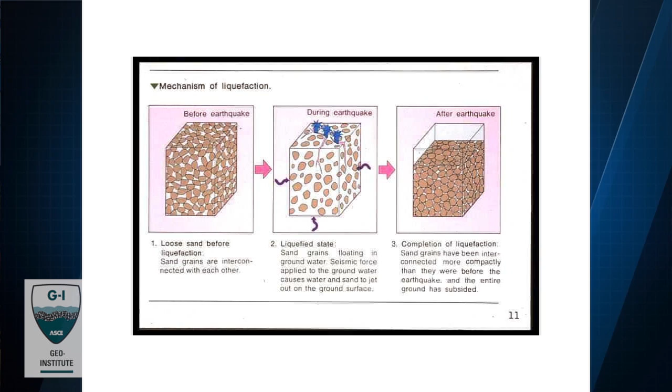So I thought, after working in this business for 50 years, if people are still asking what is liquefaction, maybe we should recap a few basic fundamentals.

Here we have a deposit of sand, very loose and saturated. When it is shaken, two things happen: the sand structure tends to collapse and pushes the water out. The rate at which it does that depends on the pressure and density of the sand. But the other thing that happens, when it's all over, is you get settlement. Now I'll show you a few slides that illustrate that.

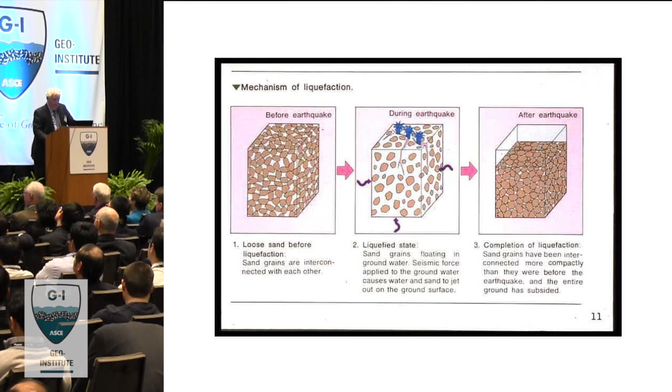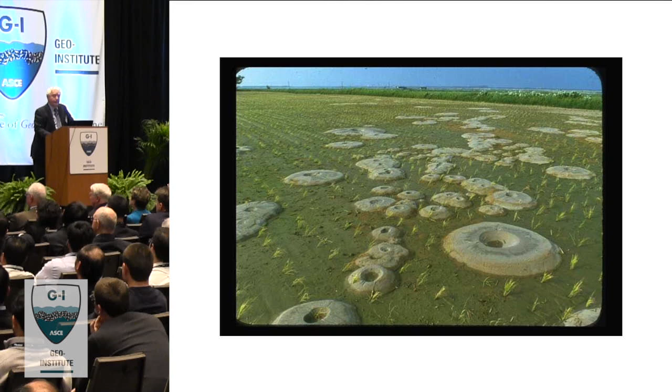is pretty steady. On the other hand, if you look at this one, the sand was ejected with explosive force. There was a fairly stiff layer overlying the liquefied material. The pressure had to build to a very high level to get out, and it suddenly just popped everything. So you see two sources, one here, about 2 meters, and all that sand was deposited as a result of the ejected material in essentially one blast.

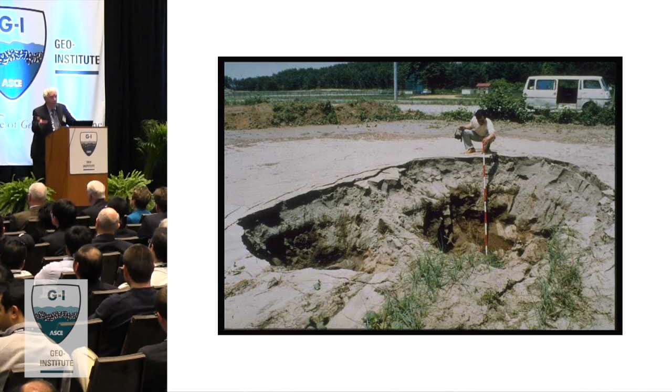In the northern part of Japan, around Noshiro and Akita Port, there were warehouses along the dock in which the floor had been blown up, and inside the warehouse was a huge mound ejected from something like that. So it's a very powerful phenomenon.

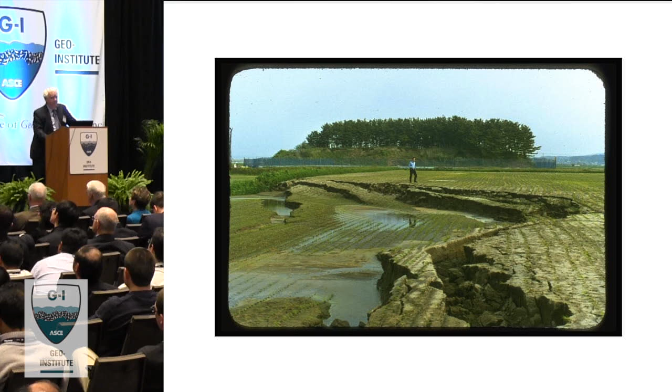Now this is a much more surface phenomenon. Part of the field is very loose and has settled, and there's nothing very special about that. But you can see that when we identify that a soil liquefies in the charts we use, we're not sure what the story is behind that. There are very different stories behind all of these, and that makes interpretation difficult.

I tend to use this example for my students when I tell them that you have to worry about balanced design. No point in designing a fortress-like structure with a lousy foundation. On the other hand, there's no point in over-designing the foundation beyond the requirements of the structure for survival.

Now, the other thing that happens when you have liquefaction is lateral spreading. On gentle slopes, it goes on for a while and peters out. But if you're close to a river or a deep ditch, then very extensive movements can occur.

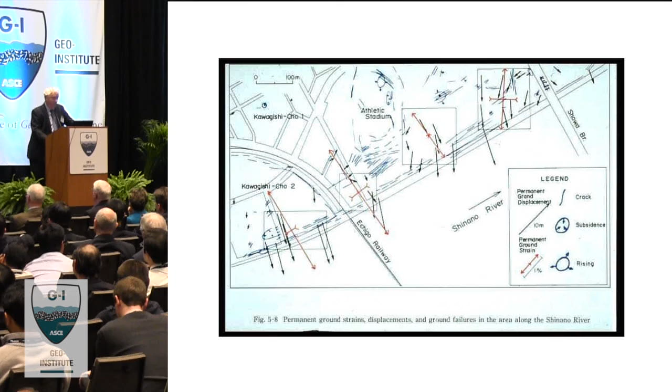Now, that had some interesting repercussions after the earthquake. There were some legal questions as to who owned what — a 10-meter-plus shift in a Japanese lot is an unheard-of thing. So there were arguments over who owned what. Now, the Showa Bridge — the bank moved in.

The top was held by this deep girder, which is tucked underneath, and it caused great damage to the bridge. They managed to prop it up and fix it. Now, this one is from the Kobe earthquake, 1995.

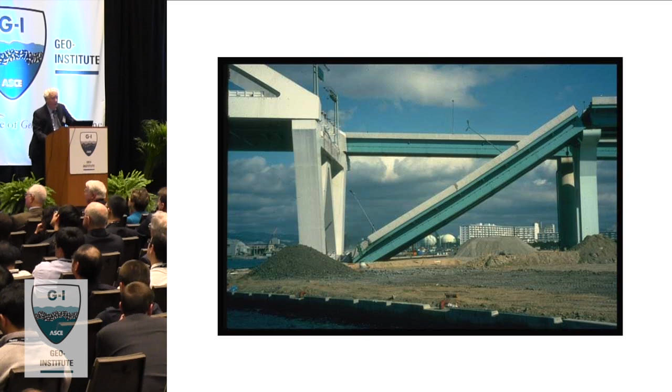Around here, the movement was about a meter, sometimes a meter and a half, into the river channel because the stuff liquefied behind the sheet piling. That caused this bridge deck to move in this direction, and the restrainers were inadequate to hold this, and it fell down. The only casualty was a truck driver who was on it at the time it fell, and he was killed. Now, the other thing of great interest to us is what happens to pile foundations when the ground moves.

Especially in port structures, that's a very important issue. The Japanese took this particular example where you have a layer near the surface that does not liquefy, a liquefiable layer, and then a layer that does not liquefy again. So the pile is sandwiched between two non-liquefying layers, and there's a lot of movement to the right or left. On the basis of many case histories, they came up with a way to analyze that: put these forces on the pile foundation, passive pressure up here, about half of the vertical pressure along here, and then analyze the pile to see what happened.

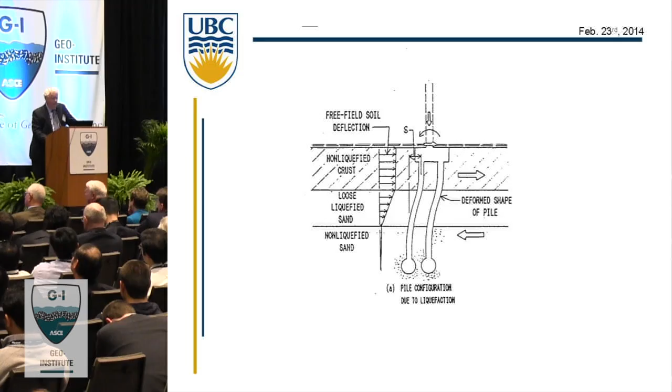That's used by one group in Japan, I think it's the railways, but it's not universally accepted. Now, when I was in Japan, I was on retainer to one of the construction companies, and they built apartment buildings around Western Japan, all on reclaimed land. They were supported on piles, concrete cast-in-place piles, minimum of 1 meter in diameter, more likely 1.5 or 1.2, one pile under each column.

And there were questions about how deep you have to bring down significant reinforcement in the cast-in-place pile. So we had to study that problem, and here is a case where you have a layer, just like I showed you, that does not liquefy, a fairly stiff layer. This is a soft layer, but not liquefiable, and then you have a stiff layer again.

So to convince them that there was a need to carry reinforcement down the pile, you can see where the large moments are accumulating, and they're about the same size. One is at the underside, and one is very close to the layer at the bottom. So that convinced them that they should not start cutting off the reinforcement until they were well down into this material.

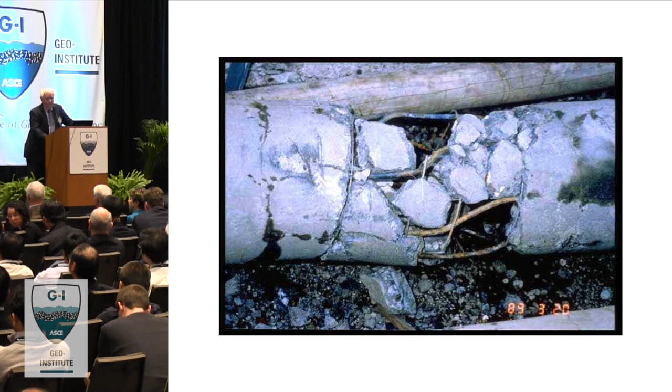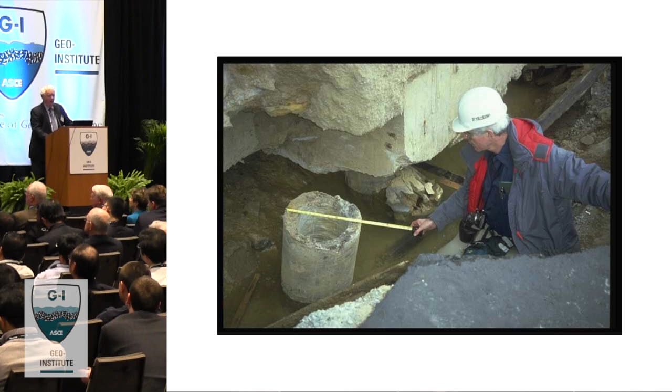This is Tom O'Rourke from Cornell. We were together on this occasion, and this is a nicely sheared off pile. The other part of the pile is right here. But again, you don't see any dense reinforcement.

Now, I found this one. I was on a crane rail, and I wondered what was happening to the pile, so I leant over, someone held my legs, and I went over and took this picture. Now, this movement is a little over a meter. The soil has come this way, flowed past the pile, with no apparent damage to the pile.

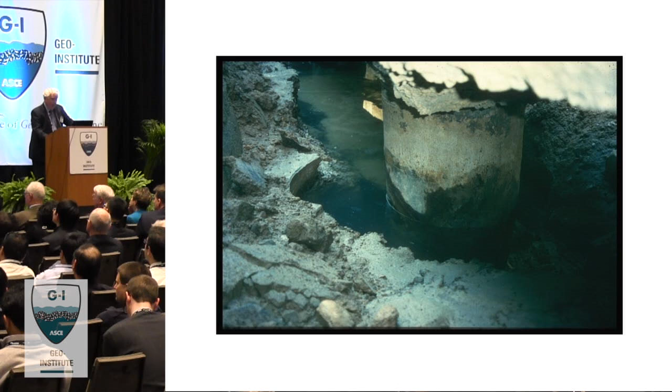Now, this pile was designed to carry crane loads, so it had a horizontal component in the design. They also put in a steel pile, of course, which had a much better survival rate. So when some lateral loading has been built into the system, those piles behave quite well, actually.

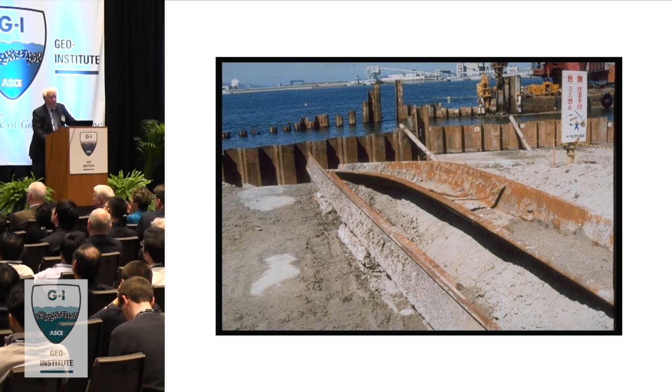Now, this is an example of, I took this because I wanted my students to see if they could figure out what the pressure of the liquefied soil was, based on the yielded shape of that pile. I can't remember now how successful they were compared to what theory would tell you, but I think they were pretty close. Now, so much for a warm-up.

We know what liquefaction is. We know what the problems are. Now let me take you back to the very beginning.

It's 1964. Two earthquakes have occurred: one, the Good Friday earthquake in Alaska, the June earthquake in Niigata. A big problem in both was liquefaction, wholesale liquefaction, flow slides, you name it.

Now, an urgent problem in Alaska was reconstruction, and of course most of that stuff had to be mortgaged. Mortgagees wanted to know, how safe is it to rebuild there? Shannon and Wilson in Seattle were commissioned to supply the advice that was needed on that topic.

Stan Wilson was a very, very clever engineer. He knew that this was going to pose new problems for him. Testing up to date would be inadequate to test the response of soils under cyclic loading of the earthquake. Liquefaction, nobody knew anything about it, except later on they looked back and saw it happened also in 1906, but nobody had studied it from a technical point of view.

So Stan Wilson had his friend, Harry Seed. They'd been to Harvard together. Harry was in Berkeley, and furthermore Harry was carrying out pulsating load tests for the State Highway Department—where you put the load on, you lift it up, but you don't pull the sample both ways to imitate the effect of traffic loading on a base. So that seemed like a great start.

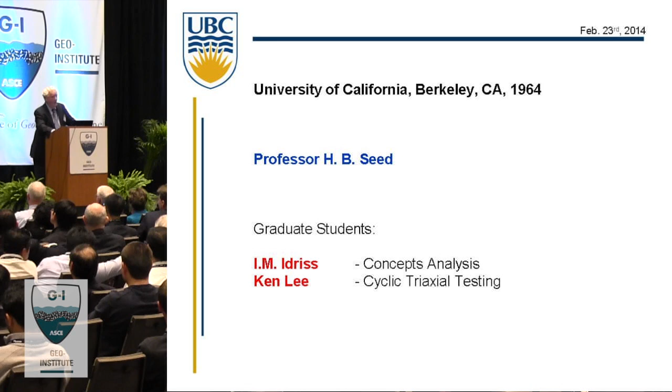Ken Lee, meantime, was beating his brains out, trying to liquefy a sample using pulsating loadings, and it wouldn't cooperate.

About this time, I had been invited in 1963 to come to Berkeley as the visiting professor in 1964. Harry invited me personally, and so I arrived on the scene just as this work was getting underway. And I saw how little anybody knew about this field, so I said to myself, what the hell am I doing in plasticity, which was my field, and I was going down to give lectures on it. And at that time, people knew a lot about plasticity.

There were some world leaders at Berkeley, like Naghdi. There was Prager back at Brown University. I was just a humble graduate from the University of Washington, but I thought, this is great, I'm going to get into this field when I go back. So I paid strict attention to what Harry and his cohorts were doing.

Now, Ken Lee was lucky. One night, something went wrong—instead of pulsating, the load grabbed the head of the sample and turned it into a cyclic load test. And it liquefied. So Ken was taken care of. He spent the next couple of years testing Monterey sand and Sacramento River sand, finding out what variables control liquefaction, giving us a deeper understanding of what it was all about.

Now somebody's got to do something about that. Now we know what stresses will cause liquefaction in the sand of a certain density. In those days, the CPT was not in the game, or the SPT either.

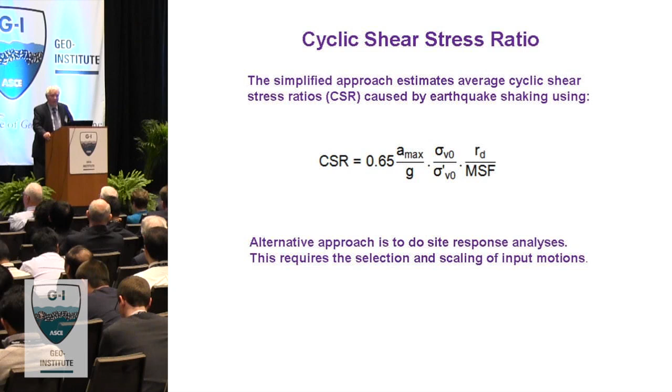Now, the one thing that did surprise me was Berkeley - but I may be running ahead of myself here. Let me stop at 75, at the time Harry, Martin and I developed that model, because this was a unique time actually. The state of the art coincided exactly with the state of practice - the cyclic loading testing, liquefaction triggering.

Now, there were two programs developed that were very useful: SHAKE by Seed and Schnabel, and Quad 4, in which Professor Idriss made a unique contribution by introducing variable damping in every finite element. Everybody was satisfied.

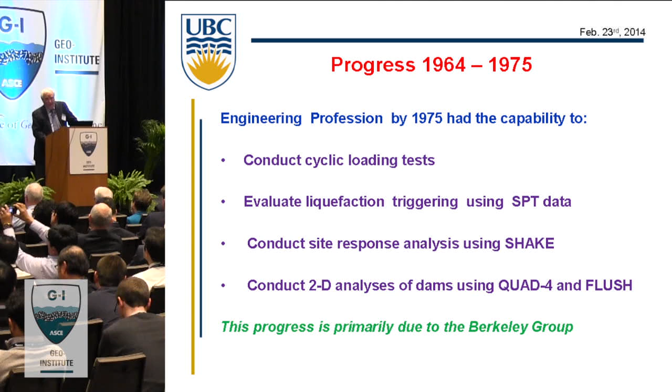It was like the Roman Catholic Church before the Reformation, and Harry was the Pope. And all that was due to the group at Berkeley. I have to give them full credit for that. Thinking about that last year at the Geo Congress, when I gave a paper on something else, I recognized

I think I'd like to read it if you don't mind. This paper is dedicated to three men who laid the foundations for the development of geotechnical earthquake engineering in the 1960s and nurtured its growth by major contributions to teaching, research, and practice over many years. The late Professor H.B. Seed of the University of California at Berkeley and his PhD students at that time, Professor Ken Lee of the University of California, Los Angeles, who died very young in a skiing accident, and Professor I.M. Idriss, recently retired from the University of California at Davis.

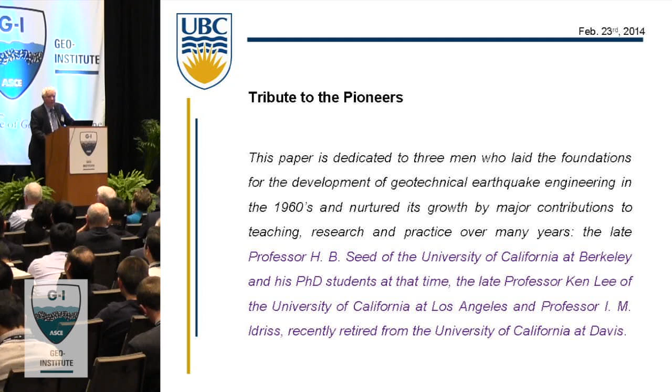And there's no doubt about it that that small group put practice on the map. In a record 10 years, everybody was doing it. Everybody had control of all they needed to do a good job.

Now, the developments from 75 to 95 were roughly what I was telling you about: nonlinear total stress analysis, nonlinear effective stress analysis, but nobody was paying too much attention. Residual strength becomes a real problem, and it's costing a fortune.

What strength do you have to resist deformations after the soil has liquefied? And assuming that you do get some significant straining, what is the strength? Well, the easy answer is measure it, but you can't measure it because the circumstances under which it is developed are not known.

Most sites have mixtures of sands and silts, high permeability and low permeability materials. If you have a layer of sand bounded by impermeable materials, when the sand liquefies, it's going to settle. Water comes to the top. In theory, if that were a continuous surface, you'd have no strength at all.

But what happens is that once that water develops, cracking develops. That water seeps up out of there. Now you have a different structure entirely. And we don't know what the strength there is.

And it was Harry Seed's final great contribution, in my opinion, that he decided to try to get this strength by analyzing case histories. It was a very difficult task. The case histories are few in number. The relevant data was hardly available.

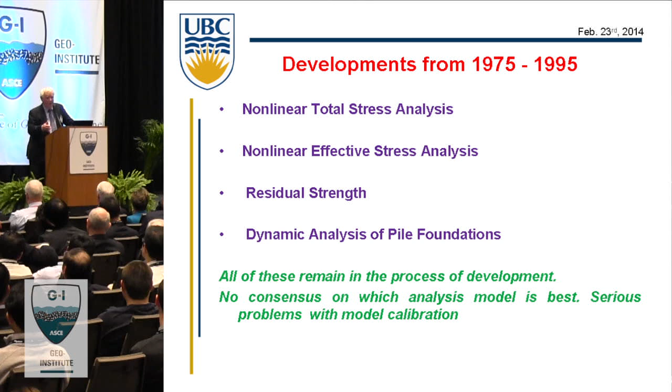Now, leading up to this, Idriss and Boulanger went over the database again, and they produced two new documents, one on SPT, one on CPT. And these documents are invaluable for the attention given to the database in both cases.

Now, I'm going to read you two warnings here. In the 80s, there was a fashion to introduce international test standards for calibrating constitutive models. The first, in 1988, was based on laboratory tests. So the designers were given what they said they needed to calibrate their models for any eventuality, mostly triaxial and consolidation. That's what they asked for, that's what they got.

Then they were asked to predict the performance in a different stress path and also in cyclic loading. And the results were not encouraging.

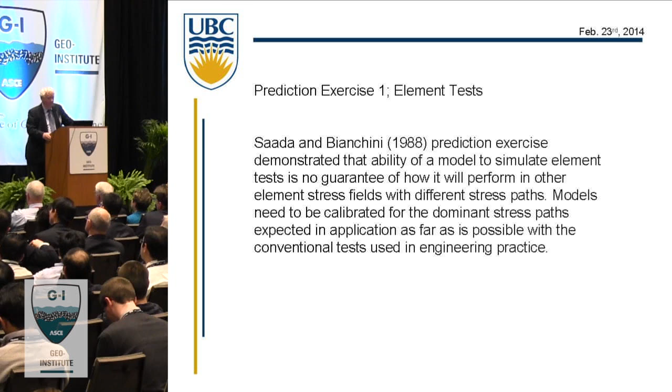Now, the next thing was 1994, when we had VELACS. This was the next step in evaluation using centrifuge tests. Centrifuge tests are in fact the ideal way to do it. I suppose it makes sense to calibrate your model on the element test first, but the stress states are homogeneous, and in the real world, they're inhomogeneous. The centrifuge allows you to develop inhomogeneous stress states. So they had to go at that.

Again, it was dismal. Now, it's interesting to see what Smith, the guy who wrote a very fine book on finite element analysis, a very knowledgeable guy, said when he was asked to comment.

A particularly insidious feature of the calibration process is that the predictor could calibrate his or her model to fit the bulk of the largely triaxial data provided in the information package and still make poor predictions of seismically induced stress paths. The same problem that happened earlier on with the laboratory test exercise.

And the problem is that the models are path dependent. They can't follow. The assumption had always been that they could calibrate their model, especially the plasticians, by triaxial and consolidation tests, and then go in any direction they liked. There'd be no problem about it. But that didn't happen.

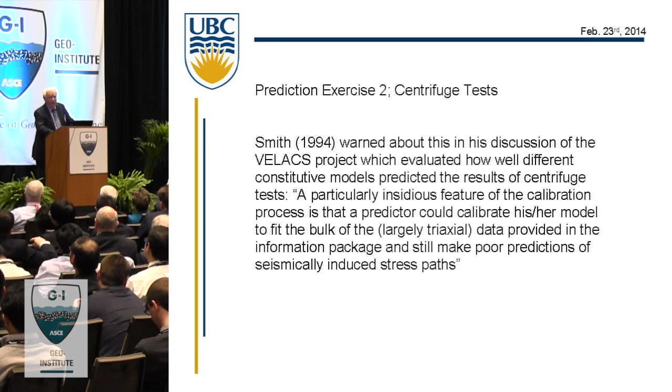I wouldn't say they were critically different, but they were significantly different. You have to rationalize those things when you get it. My advice is never let an analysis override your instinctual judgment as to whether things are right or not.

Now, this is how the latest effort from Professor Idriss matches what Youd was doing. They're pretty close, but these are for shallow depths, and for 7.5 earthquakes.

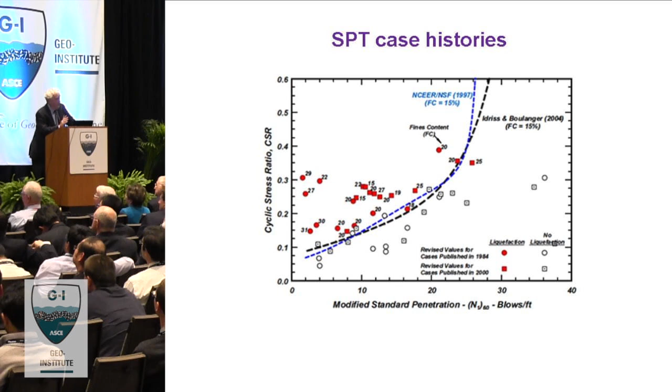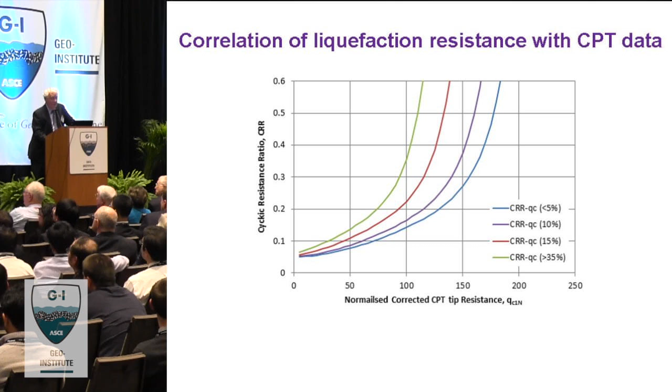Now, there's one thing which I'm going to talk to Professor Idriss about when I have a chance to talk to him privately. This is his curves for the CPT data. One of the pioneers of that method, Peter Robertson, is here. You should talk to him. He's a pretty sharp guy on this one.

I'll be coming to you in a moment, Dr. Stokoe. You are not forgotten.

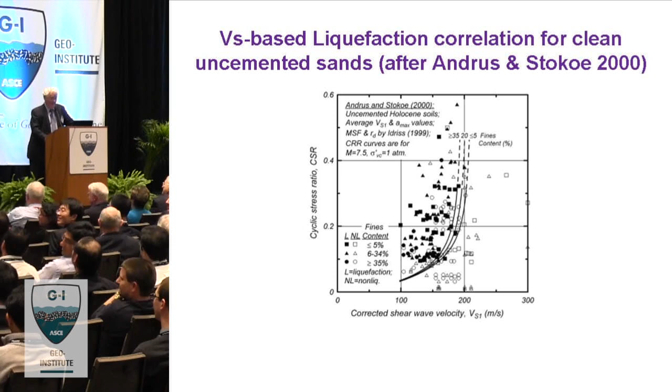Now, the one thing I would like to draw to the attention of those of you who are in practice, or in research for that matter, is that when you're processing the data from a seismic cone or whatever, there's great software out there.

This is the stuff here. This thing does about—if you believe the model that's used to calculate these various things, you've got the answer you want. If you don't believe that, try a different model. But the processing is difficult, impresses the hell out of clients with these lovely colors, and you can see how it all comes out in the wash.

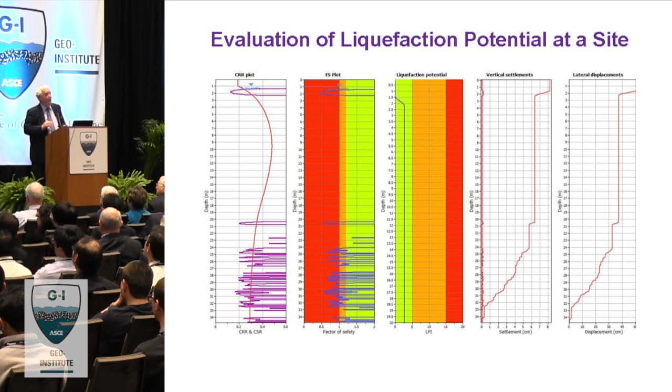You have your CRR resistance line, you have the demand, you have the factor of safety. We like to use liquefaction potential also, which is, once we've got the factors of safety, we like to weight them. The ones near the top we weight as 1, right at the bottom is 0, and we vary it linearly in between. The idea being that a liquefied layer at the top is a hell of a lot more trouble than a liquefied layer at the bottom. And we don't want the deep liquefied layers over-exerting influence on our design.

Now we'll pass Dr. Stokoe quietly this time.

Now, I'm involved in a school project in British Columbia. We're retrofitting 800 schools over a 15-year period. Cost estimated so far at $2.5 billion.

Now, the way it works, after a shaky start, the government decided that they would make an allocation every year to the University of British Columbia, $1 million, to do the research into retrofitting the schools—both the geotechnical research and the structural research—to come up with efficient, cost-effective methods of dealing with the problem.

The rest of the money goes to, of course, retrofitting. But they also established a technical review board. At the moment, there are 25 engineers on it, 5 of whom are geotechs.

The school has to come up with a plan for retrofit. And if they have a liquefaction problem, they have to decide how they're going to do it—they don't do it yet, just how they're planning on doing it, and so on. Now, this report goes to the technical review board. They look at it to see if the school followed the guidelines. And if they didn't, they send it back. And if they don't comply, they don't get paid, they don't get any money. So there's a very big whip there to keep people in line.

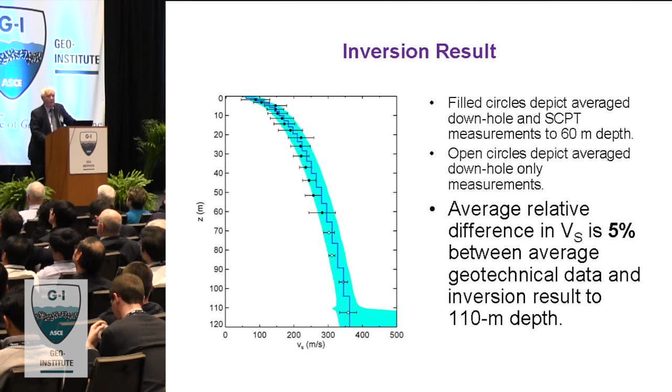And we have a system now, we can go down 110 meters, and you can see those points in between. The filled points are SCPT, the open circles are downhole, and the blue band with the jagged line is the average from the ambient vibrations. The system we have takes the dispersion data, runs 100,000 Monte Carlo simulations, gets the mean and the standard deviation from that, and that's what you're looking at here in the color. So there's only about a 5% difference between doing it the measured way and using ambient vibrations.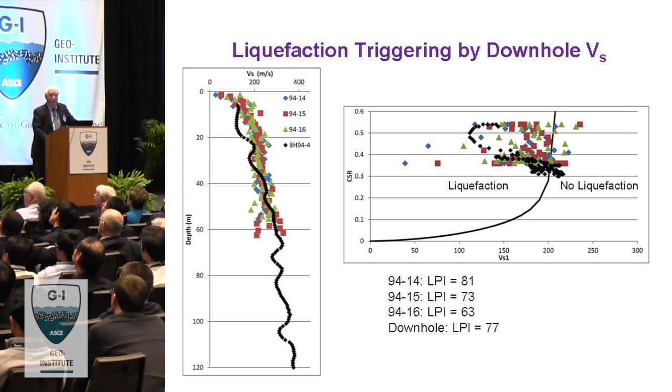Now, here's something that I want to draw to your attention, Dr. Idriss. He's come up with a new magnitude scaling factor, which increases the potency of earthquakes below, let's say, 6 to cause trouble. And in Canada, that's an issue, because in eastern Canada, most of the earthquakes are in that range, not greater than 6.5 mostly. But in his latest publication, he has a new set of magnitude scaling factors, some of which are smooshed.

Drop it down even further. So that is of some concern to us, and I was hoping he'd be here so I could talk to him about it. And there he is in the front row.

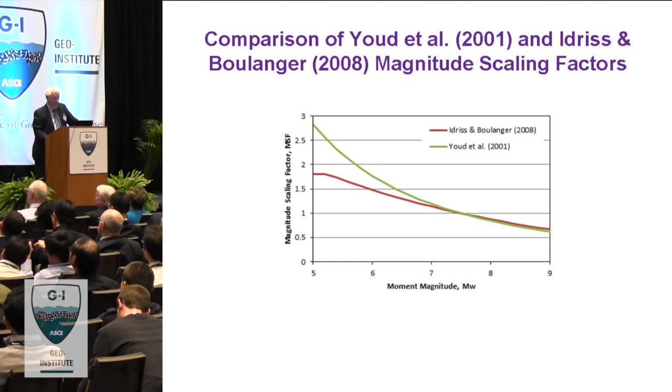Now you can see the difference it makes if you go to a magnitude 6. This is what you'd get from the old MSFs, and this is the new one. So there's a difference in the factor of safety, and that can be significant—but of course it's irrelevant if it's not correct.

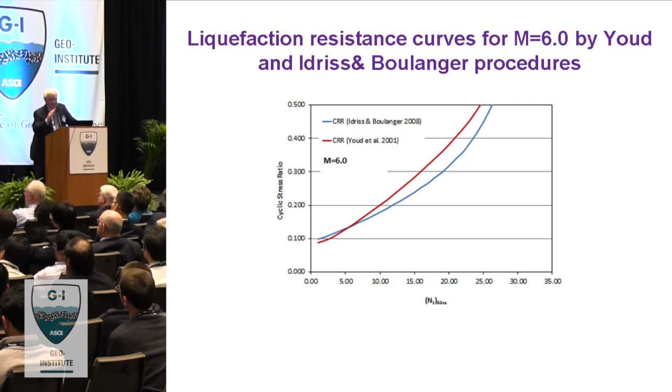The other remaining challenge is probabilistic ground motions. In Vancouver, the design acceleration for site class C is 0.46 G. Now, if you're looking at liquefaction, what magnitude and acceleration do you use? Until 2007, they said pick one of the bigger ones, 7.3, and associate that with the full probabilistic ground motion. That was very hard on the system. We did a study, myself and a colleague named Wightman, in 2007, showing they shouldn't be using 7.3—if using the full acceleration, they should use the average value, about 6.8.

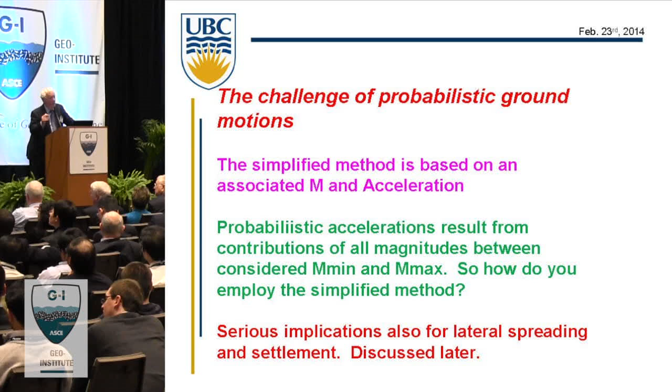In the next edition of the guidelines circulating for use in Vancouver, they compromised and dropped it to 7, which is still too high. These underestimations of factor of safety are very critical for lateral spreading and for settlement.

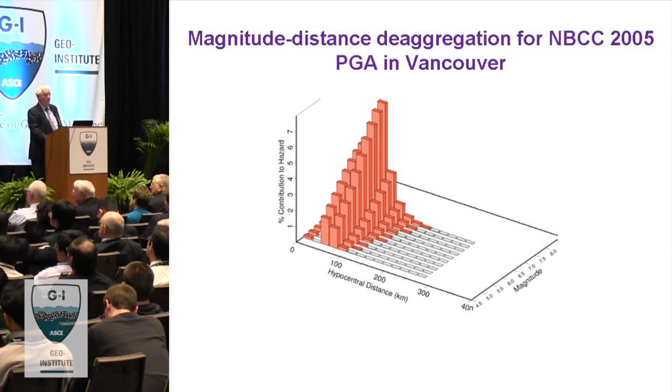So this is what contributes to the NBCC in Vancouver—all of these earthquakes. These earthquakes contribute different amounts, and this is the percentage that each magnitude contributes. The biggest magnitude contributes 16%.

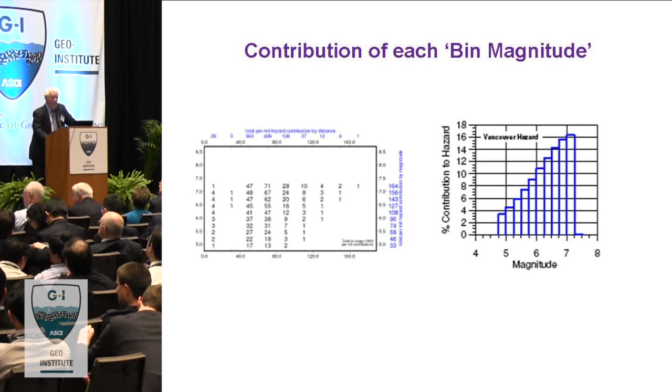Way back in 1984, I attended a World Conference keynote by Professor Idriss, and he addressed this issue. He suggested we should weight the magnitudes by their contribution to the probability, then run a hazard analysis to get a liquefaction hazard curve for whatever magnitude you decide to adopt. Whatever you do it for, you'll get a curve such that if you enter it at the right probability, you get the acceleration to use with that magnitude.

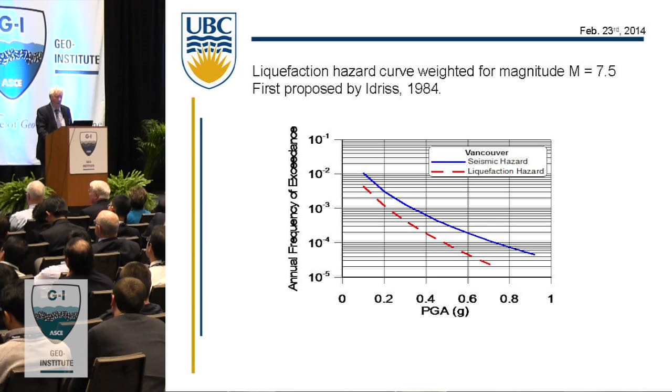There's nothing to it really, it's child's play—the only problem is you have to run the analysis. In Canada, you can probably send your weighted magnitudes to the GSC and they might run it for you. At the university, we subscribe to EZ-FRISK, we have a license for it, so I use that. This was a very bright idea back in 1984, but it's only recently that people are beginning to realize how useful it is.

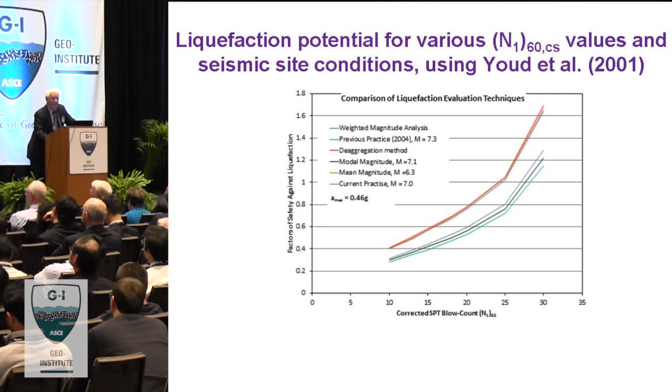This shows the difference in factor of safety between using Idriss's suggested weighted magnitude method versus using the mean magnitude of 6.3. There you go. All the other suggestions—7.3, 7, and so on—are down here. You have a very substantial difference in the factor of safety.

You're underestimating it badly. Now, for lateral spreading, these methods are based on Robertson and Zhang, and Seed's LDI method. They're all based on maximum shear strain developed, or allowed to develop in Seed's case, and the factor of safety against liquefaction. When you enter one of these curves and come up—say you have 60%—you get a maximum cyclic shear strain of over 20%, a whopping number. If you add 0.2 to that, you're up to about 10%—that's half. So you can't toss these fractions of factors of safety away just because you don't want to do a proper probabilistic assessment.

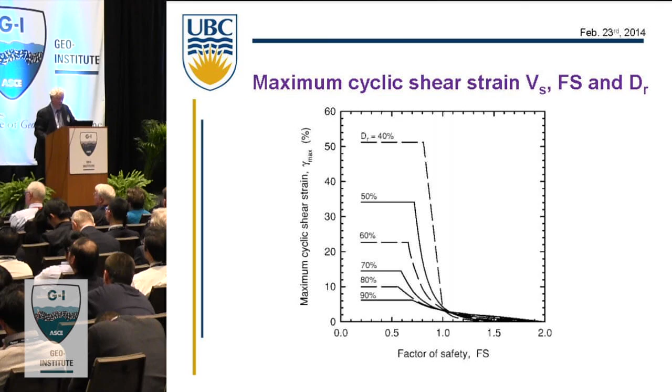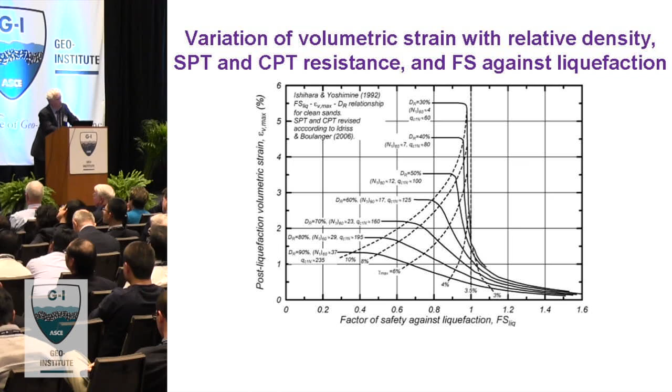In the same way with settlement—settlement is calculated using Ishihara's method. Again, what do you find? You're depending on the factor of safety, which gives you the shear strain, which gives you the post-liquefaction volumetric strain. If you're down in the area where they drop sharply, and you move 0.2 units of factor of safety to the right, you cut your settlement in half. These are studies we carried out on the Delta in British Columbia for another purpose, for the government.

Now that's fine. How do you get the average acceleration when you have probabilistic ground motions? How do you handle Youd's equation with probabilistic ground motions?

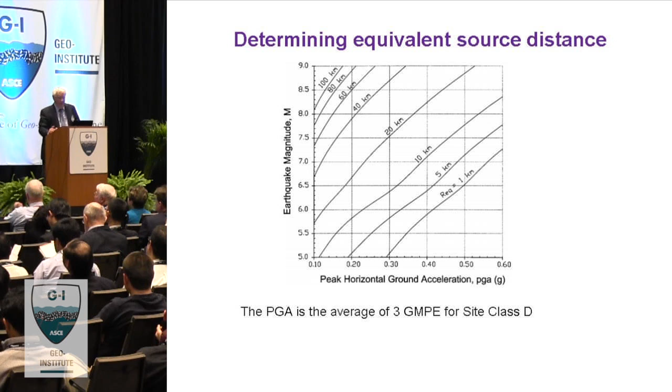Well, the first way to do it is to do what we did earlier on for factor of safety. You take each magnitude at various distances. You get this information from the Geological Survey. You show how much that magnitude contributes to the acceleration at those distances. Then for each of those distances, you calculate Youd's displacement.

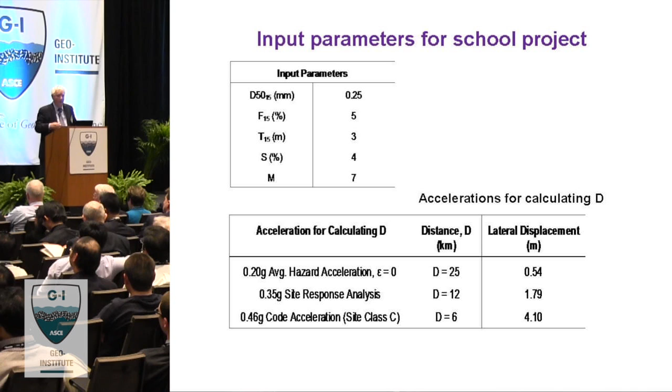That's the way of doing it. The first time you do it, it's an Excel slog, but after that it's not. If you have the information, it's okay. But the other way to do it, which is very easy, again if you have a hazard program...

To get the average acceleration, what I do is calculate the hazard acceleration with epsilon equal to 0. That is, no variation about the mean, because the probabilistic ground motions are calculated using a normal distribution about the mean, and how far you are from the mean is measured in terms of standard deviations—epsilon being the number of standard deviations used at any particular time.

Now in Vancouver, the average epsilon is 2, which means that to get those probabilistic ground motions, on average it's 2 standard deviations. That's a long way from the average.

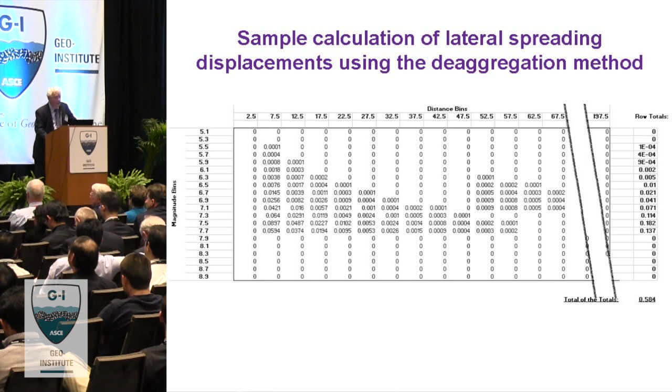So we toss out epsilon and we get the average acceleration, go into Les Youd with that, and what do we get? We get 0.54. It's very close, not quite the same, because we use a much finer mesh when we're running the hazard program than when we're running the Excel, for obvious reasons.

They don't claim that that's the lateral displacement. It's an indication of whether you've got a serious problem or not. So perhaps to some extent that's misleading to have that in there.

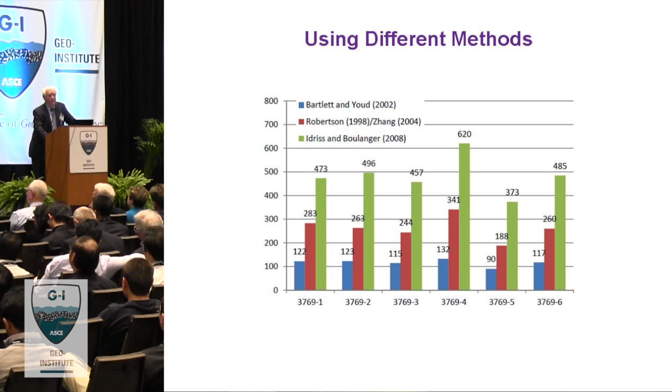So there's a lot of uncertainty in the calculations, but you also have a lot of errors depending on how you calculate them. You have to follow the rules of the method as explained by the author, and you have to have as precise an indication of what's going on as you possibly can get.

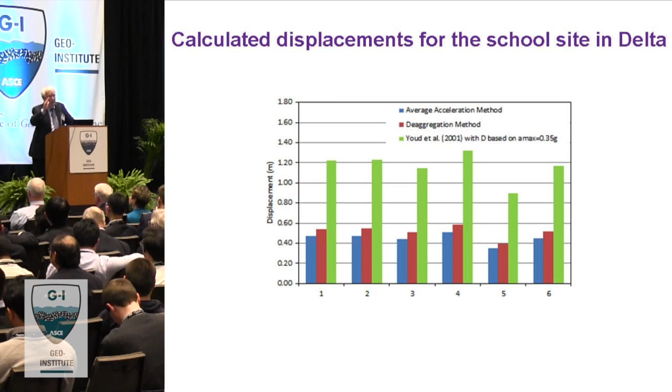And that means you don't get careless when you calculate factors of safety. If you use the de-aggregation method or Idriss's weighted magnitude method, you will have a very accurate assessment—given the rest of the data is okay—of what the factor of safety is. If you arbitrarily stick some magnitude in because you like it, with the probabilistic thing, the chances are you're overestimating, costing yourself and your client money.

I want to close the loop. Now, the school thing—when the geotech does his job, he calculates all this stuff. Let's hope he calculates it right. If he doesn't, we send it back to do it again. The structural engineer has his building ready to go. Now, what's going to happen?

Does the geotech decide I'm going to treat the liquefaction using sand drains, or compaction grouting, or jet grouting, or whatever you want to call it, or not.

In the beginning, they were doing that, and it was costing a lot of money for two reasons. You can't compact under a school without pulling up the floors and making the school unusable for about 6 months. To move a small school to temporary accommodation is $250,000. A big school can be as high as $750,000. That's on top of all the other costs.

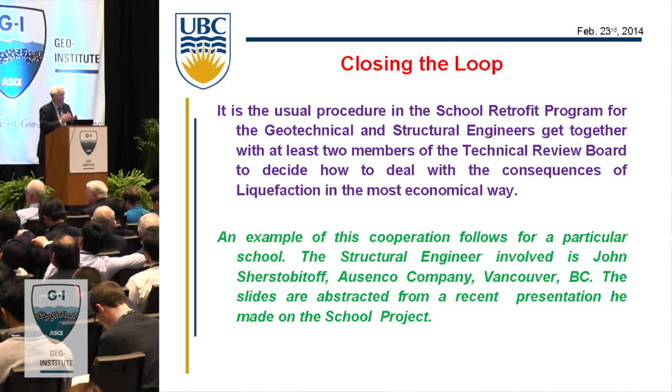So we decided, no, they had to come to the TRB to decide what to do. I call that closing the loop. We're forcing the geotech and the structural guys to get together under the aegis of the TRB and hash it out and decide what's the best and most economical way of doing it. And here you go, I'm not going to talk about that, but I just wanted to show it.

Since it's not in the thing, we have a manual that describes all of this stuff, Seismic Retrofit Guidelines, 2nd edition, liquefaction. And we're going to have to revise it again now because Canada is going to change the whole set of ground motions for the 2015 code. Much, much different than previously.

So what does the structural guy bring to the meeting? He says, these are my limits. My LDRS, that is the lateral displacement resisting system, I cannot tolerate more than 2.5% drift. My vertical exterior loads in this building cannot take more than 1.25%. Interior columns can take 4% because they're steel.

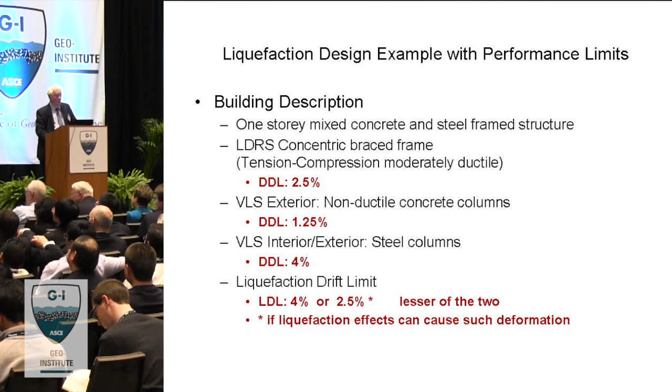Now okay, so the geotech comes along. Don't tell me I took it out, well I guess I pulled it out. Sorry. The geotech calculated the amount of lateral spreading, the amount of vertical settlement. This is the school in question.

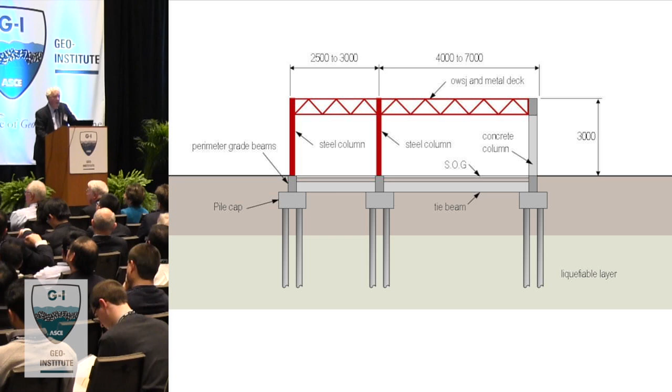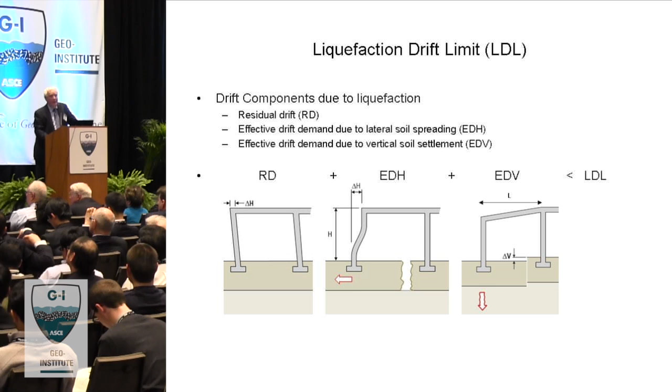Now the drift limits are set up like RD is the residual drift, that's the drift just due to shaking, assuming the foundation is rigid. Then we have the effect of the horizontal displacement, drift I should say. We have the vertical, and they must be less than the allowable drift, total allowable drift.

Now here's the school again. Now there's an interior frame here, and this has struts on it. Now it doesn't actually have a tie beam. So this is what will happen to that: this will go down, this will go down, and this puts additional strain on this thing, it may go. So this has to be, this governs now.

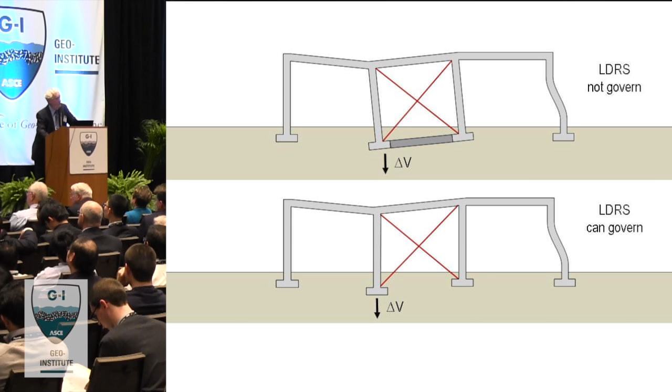Now if we put a tie beam in there, that doesn't happen. This will rotate, but now the troublesome parts are the column, not the lateral displacement resisting system. And here's a building in New Zealand that behaved just like that. It rotated, but it was tied at the bottom and it did not spread.

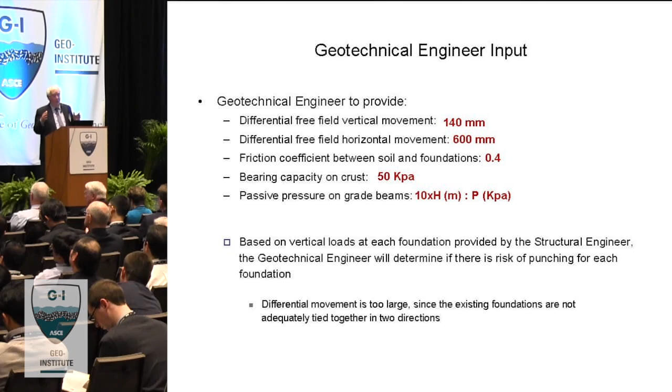Here's the geotech's input: 140 millimeters differential vertical movement, 600 millimeters horizontally. Coefficient of friction between soil and foundation, 0.4. Bearing capacity on the crust, 50 kPa. Because the first thing that the geotech has to demonstrate is that the footings won't punch through into the liquefied material. This gives you just an idea what the school looks like.

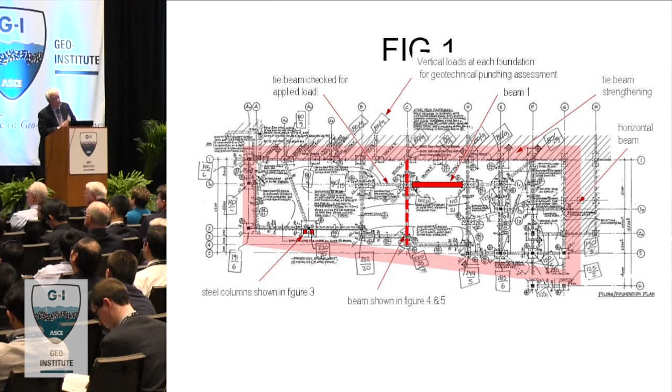And here's that beam. The red there shows the beam just put in, and the red vertically is a new tie beam that went in. The steel columns in the interior can take 4%. It turns out that the total drift is 3.8%. The steel columns can take 4%, they're okay.

The external column, remember we fixed the LDRS in the middle by putting in a tie beam, that's out of the picture. Now all that's left is this exterior concrete column. How are we going to fix that? Well, the structural engineer decided to put in a new pedestal, a new concrete pedestal at the bottom, put in a steel column, carry it up to the top, and then brace the whole thing against the roof. And it's over, that's it.

No attempt to remediate liquefaction. All that money was saved. All it takes is a couple of tie beams and a couple of steel columns to carry the extra load. The school is not interrupted to any significant extent. You saved all that money on extra classrooms.

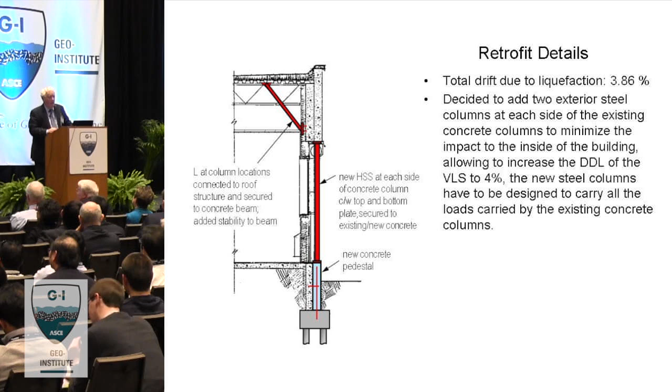Now that's how we work on the school project, and it's not a bad model, actually, for geotechs and structural engineers to follow in the future. There's the finished job: column, steel columns, new tie beams.